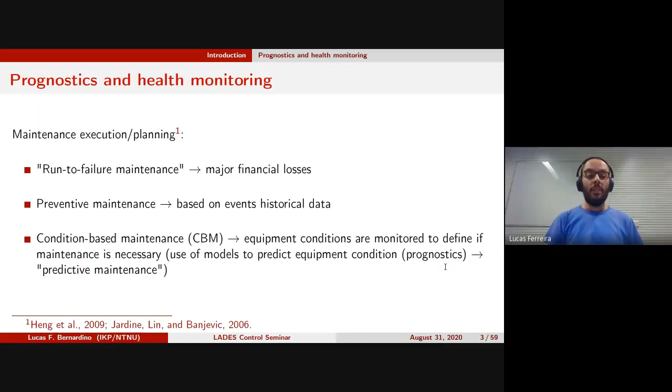But when you do condition assessment, you have to try to use some model to predict what is going to be the equipment condition in the future. And for this we give the name prognostics. This approach is also called predictive maintenance. So with prognostics, the ultimate goal is to try to estimate the equipment's remaining useful lifetime.

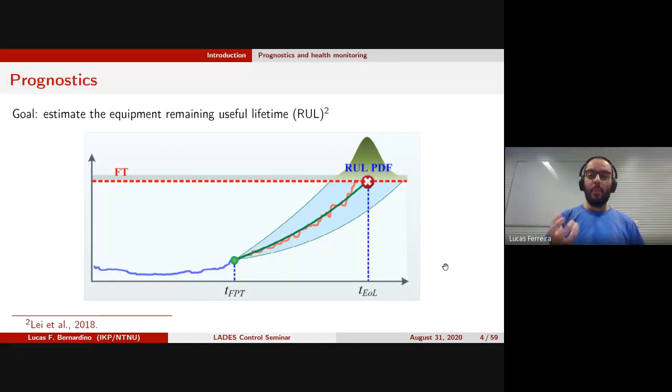And there's a number of ways of doing that. But what we have to keep in mind is that the system is subject to a lot of uncertainty. So usually the remaining useful lifetime, or RUL, is best represented as a probability distribution. So you have to keep that in mind.

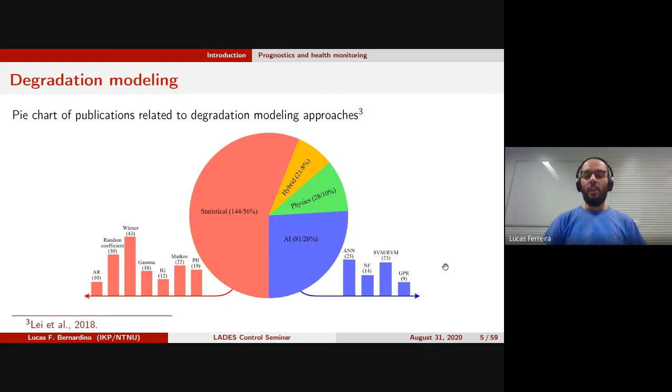When you aim to perform the modeling of the degradation process, we have some approaches in the literature. Most of the approaches used are based on statistical models. Some are based on artificial intelligence models. A few of them are based on physics and hybrid models.

And why is that? Well, let's take, for instance, the Paris law. The Paris law is a classical attempt of phenomenological, or first principle, prediction of crack propagation in systems subject to stress.

So we have this power law model in which A is the crack length, and you have a dependence with the stress applied to the component or the equipment. And there's also this very classical study that describes or measures the behavior of this derivative in wear systems.

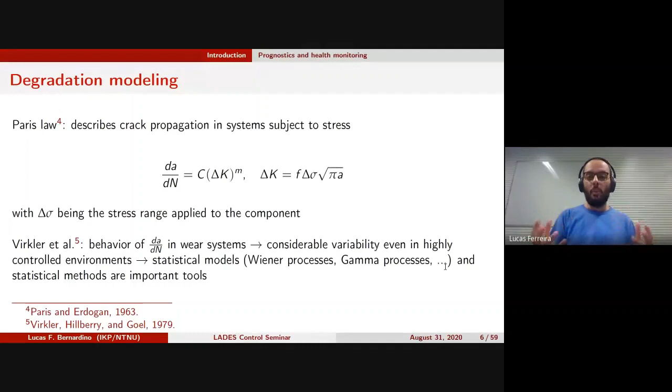And what is seen is that there's considerable variability, even in highly controlled environments. So you see the process is basically statistical by nature. So it's very natural to treat this with statistical models like Wiener processes, gamma processes. And when you don't do that, you have to use some kind of statistical methods to account for the uncertainty and the probability.

One of these statistical methods is the Bayesian filtering. So I'm going to present some Bayesian filtering concepts. This is well known in the control community. It's kind of Bayesian filtering, but the essence of it is to try and estimate states, hidden states of dynamic systems subject to model and measurement uncertainties.

So for you to make the Bayesian filtering treatment, you have to have a dynamic model, which will give you the temporal update of your distributions, and recursive estimation for you to update information with the measurement. And for that, you use Bayes' theorem. We are going to go through a little bit of that.

The basic assumption of Bayesian filtering is that the process behaves as a Markov process. So this means that the process is memoryless. The evolution and the observation depend only on the current state. So what has happened in the past doesn't influence anymore, given the current state.

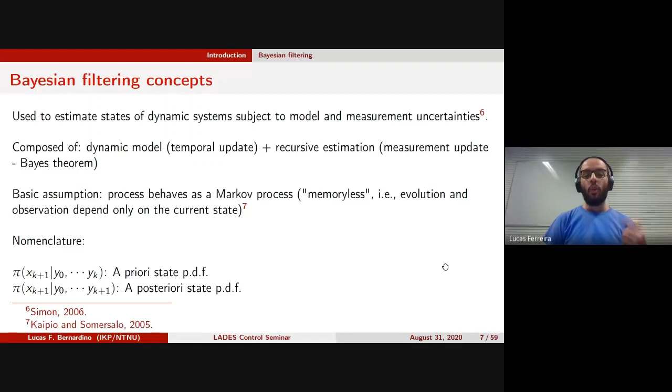So the nomenclature that I'm going to use is this pi for the PDF. So you see an a priori PDF, which is the distribution given measurements up until the previous time instant, and a posteriori when you have incorporated the current measurement. Measurements are given by y.

So the first part of the Bayesian filtering is the temporal update, when you have a PDF that is projected in time. This generates the so-called a priori estimate. So you project the previous a posteriori into the current a priori, and you do this by the second integral.

And you see that this first term on the integral is the probability of the next state given the current one. And this is called the Markov transition kernel in the Bayesian filtering traditional literature, but it's essentially our dynamic model. So for example, we have this very traditional linear model that represents one Markov transition kernel that is going to be Gaussian.

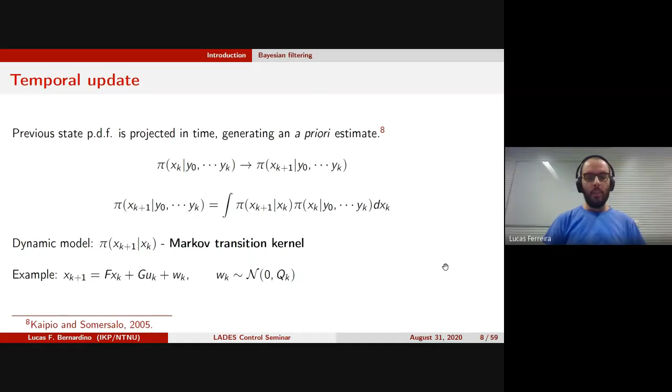Also, the second part of the Bayesian filtering framework is the measurement update, in which you have an a priori PDF that is updated with measurement information, originating an a posteriori estimate. So you have the incorporation of information into the PDF, and this is done by Bayes' theorem. It's the second equation, and the term in the denominator, it's kind of awkward to look into, but it's basically a normalization, so we shouldn't look too much into it.

But what's important is the likelihood function that I have highlighted here. And it's a probability of the measurement given the states. And this is basically your observation model, how you translate the measurement into information about the state. And also, this can be very complicated, but can also be very simple. For instance, a linear model.

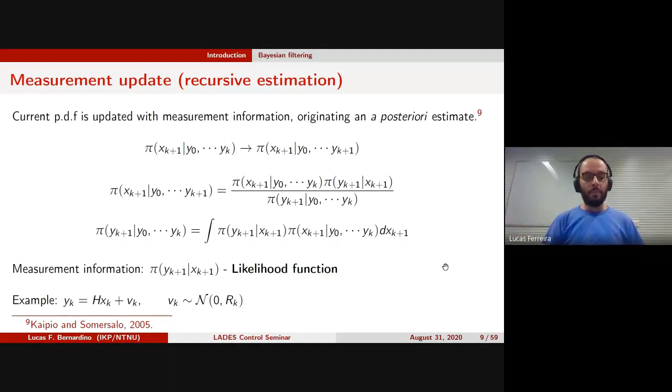And when everything is linear in this framework, we can reduce the Bayesian filtering problem into the Kalman filter. So we have assumed linear dynamic model and Gaussian uncorrelated noise processes. And this generates Gaussian distributions throughout all the states. So it's defined by its mean and covariance.

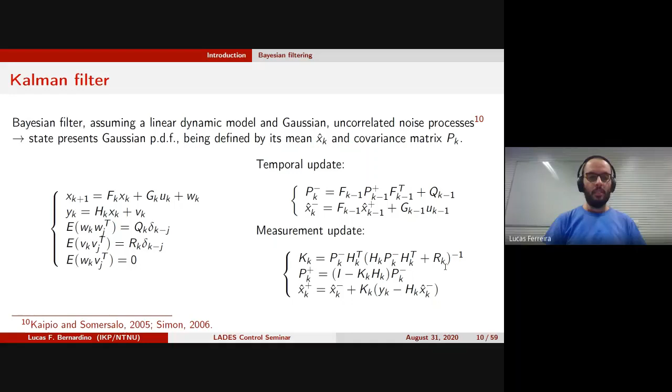But the Kalman filter relies on very strong assumptions regarding both the process model and the distribution of the random variables. So we have some natural extensions for the Kalman filter. For instance, the extended Kalman filter, which is based on local linearization of the dynamic model. So it's adequate for mildly nonlinear systems with Gaussian distributed random variables.

So we are more flexible now with relation to the linearity of the model. With the unscented Kalman filter, we try also to do a higher order approximation for the estimate and covariance of the states, which is based on sampling. The sampling is the unscented transformation, which is deterministic and is optimal in some ways.

So it's adequate for trying to approximate nonlinear systems and distributions that are non-Gaussian, and which can become non-Gaussian by this nonlinear transformation. The particle filter, for instance, is the more complex of these approaches, which is based on Monte Carlo sampling. And we try to approximate the Bayesian filtering problem and reconstructing the distribution itself. So it can deal with nonlinearities and non-Gaussian random variables.

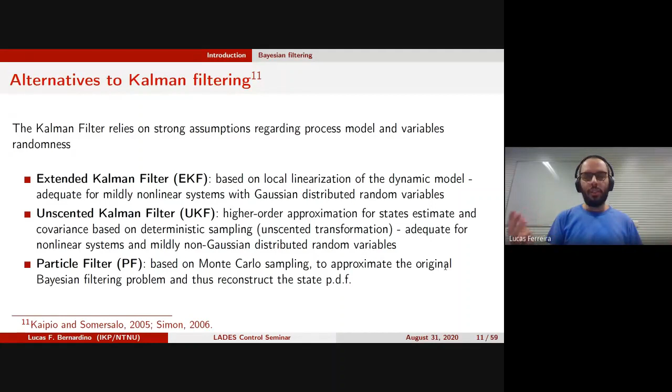So some important remarks about the particle filter. The strategy it implements is based on importance sampling, which is basically the sampling of particles using trial distributions to try and make the state transition calculations more accurate, only looking into what is relevant.

The use of this approach leads us to the simplest particle filter, the SIS filter. SIS filters are very known for having weight degeneracy, which consists of basically you not being able to characterize properly your distribution because you have the curse of dimensionality, and some particles simply are not relevant anymore because of low transition probabilities altogether.

So what is best is that if you could return the particles into a more relevant set. And for this, we have resampling. So the SIR filter comes to try and tackle this issue. And then you obtain a set of particles with equal weights that represent your distribution better. So you replicate important particles and remove low, irrelevant ones, let's put it that way.

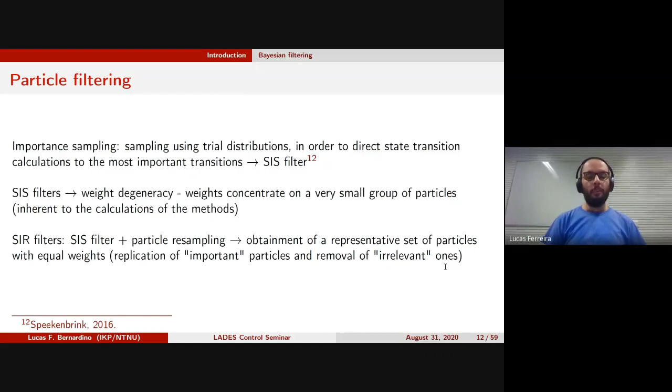Okay, so that was it for Bayesian filtering. But let's go back to our health-aware control definition. Those are basically strategies that consider prognostics into the control structure, and you try to make your control and operational decisions also based on equipment degradation.

The first known appearance of this term in my literature review was by Escobar, in which it was a very simple approach, actually. It was based on a prognostics module and a PID controller, so not necessarily do you have to have advanced control structures for you to do health-aware control.

But before that, this group led by Pereira implemented an MPC controller with health constraints. So this term health-aware control is new, but the approach is not that new, so it's hard to track where it began. In his approach, the failure was prevented on the considered operational window. So we have some other approaches that came after that.

Sanchez made an MPC with a damage term added to the controller objective function, and he observed the trade-off between process performance and the equipment damage.

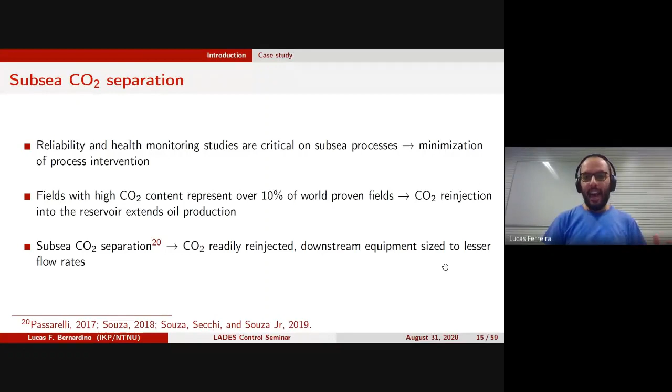So it's very important that we study how to operate optimally this kind of system. The objectives of this work were to investigate the main aspects of the development of a health-aware control system applied to this process of national importance.

For this, we need to study the modeling of the CO2 separation system, perform identification and control of the process. We also need to study the degradation model, in which, in our case, we focus on the multi-phase pump, because that's the equipment that is most prone to degradation.

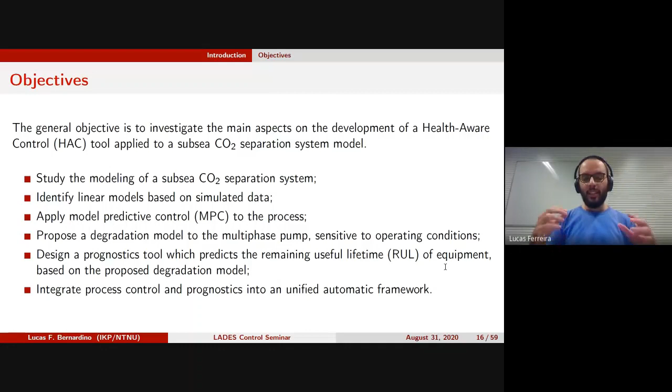And we want this model to be sensitive to operating conditions so that we can optimize the system. We aim to design also a prognostics tool, which predicts the RUL of equipment based on this degradation model, and we aimed also to integrate all of this into a unified framework.

So I'm just checking the time. Okay.

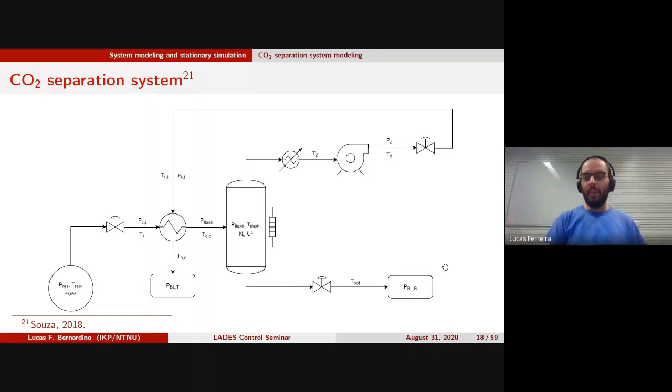And we have an outlet stream that is hot because of the compression. This is the current that is used in heat integration. And the compressed stream is led into reinjection. And the bottom of the flash drum is led into the top side.

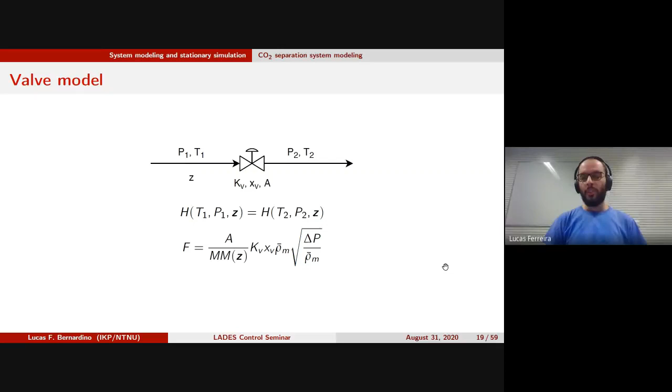Okay, so we have valve models. This is basically a model of constant enthalpy, but we also have to model the flow through this valve as proportional to the square root of the pressure variation.

We have the heat exchanger model, which comprises energy balances. They were performed in a discretized fashion, so we have a model for each pseudo stage.

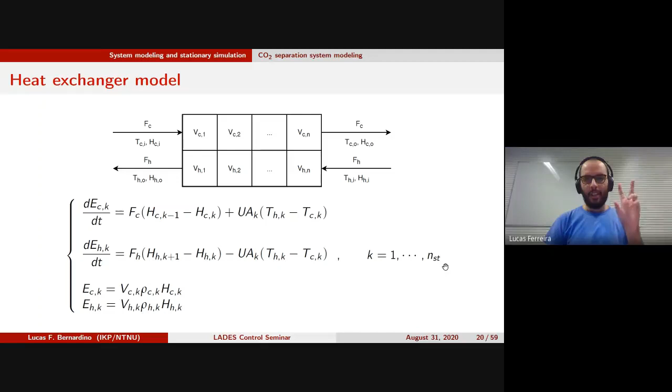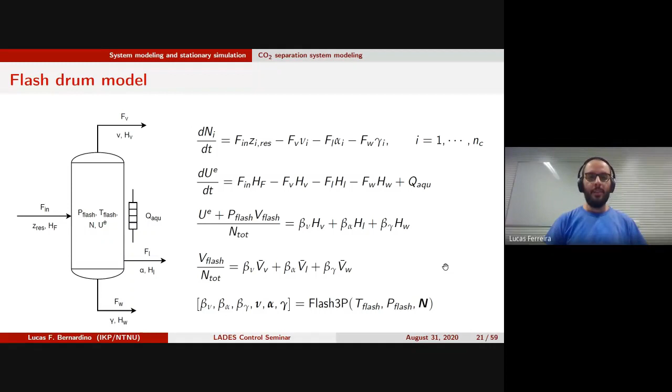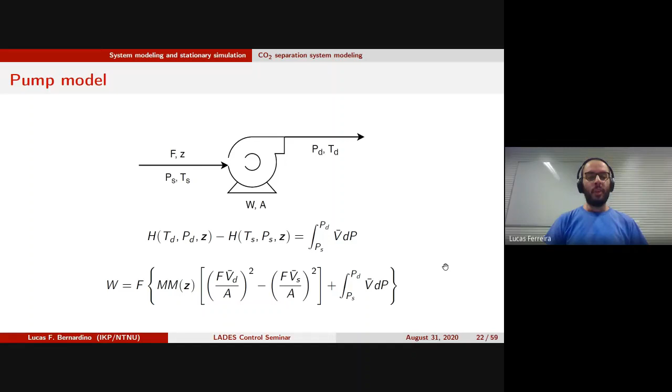But also we have the thermodynamic model that is the key to this problem. We have the pump model that performs energy balance and also the relation between the pump power and the flow through this pump.

So to integrate all of these models, we use Python to model this, to perform the simulation of the system. We use the CO2therm package that was developed by Souza, which was interfaced to Python.

The stationary simulation was performed using fsolve from the SciPy library.

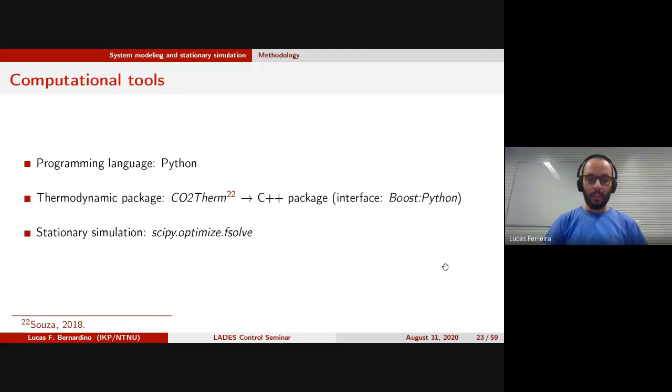So for the stationary simulation, there were some numerical challenges. We had to split the problem into two: first solve the mass balances that involve some of the temperatures of the process and the valve openings, and then go and solve the remaining equations.

The values that I present here are the values for design of the system. So yeah, we performed the stationary simulations, and these are the results. They are described in my dissertation.

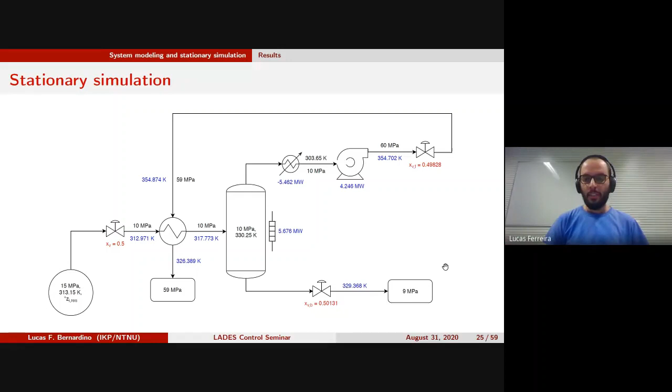So after that, it was time for designing the controller for the system. So we have to consider the system in its dynamic form. And the modeling that we performed resulted in a differential algebraic equation system that was challenging to solve, but fortunately...

Python has a nice library to solve DAEs, which is the IDA algorithm included in the Assimulo package. So if anyone is interested in this kind of problem, this is a nice tool.

So possible disturbances are the reservoir conditions and the battery limit pressure values, the pressure on the top side and the pressure of injection. For manipulated variables, we have basically the valve openings and the duties of the heat exchangers and the pump power, of course.

And we selected some output variables that are important for operational purposes, which are the flow from the reservoir, the pressure and temperature of operation of the flash, the temperature after the heat exchanger, the flows of each of the batteries, the composition of CO2 that is separated, and the liquid volumetric fraction of the flash that is important.

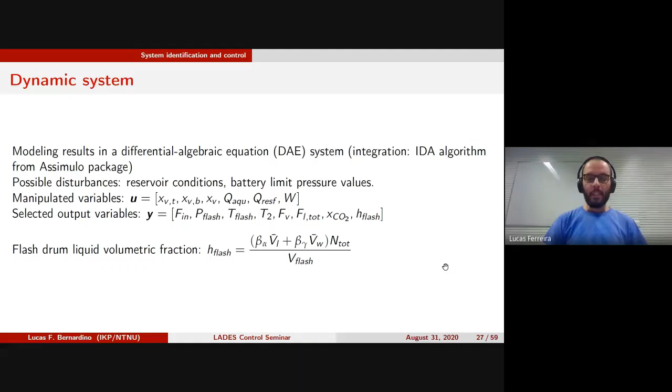It's basically a level control. So as this pair, volumetric fraction and bottom valve, is available for use to stabilize the plant, because we have an integrating behavior on the flash drum, we chose this pair for stabilizing the system.

So we tuned the PI controller for that using the SIMC rules. For that, we have to identify an approximate model, and this was done with some step changes in the valve opening.

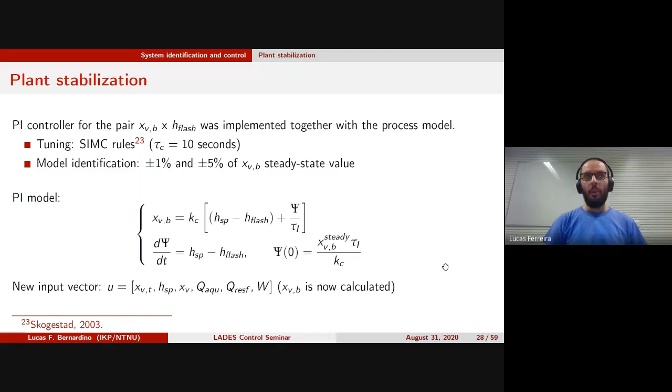So this is the implementation that we did for the PI model. It's an idealized version, continuous version. And the new input vector, of course, we have to remove this valve, and now we have available for us to manipulate the set point of this controller.

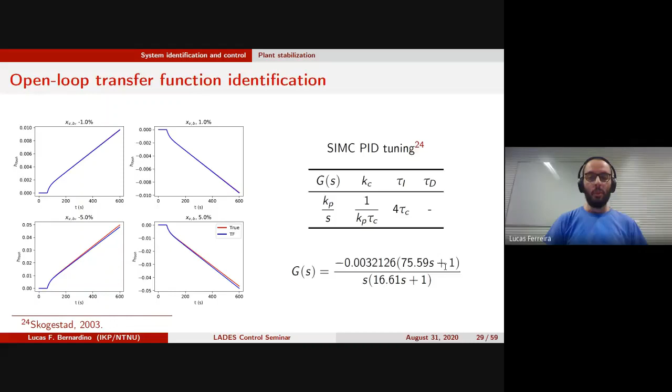So these are the identification results. The system behaves almost as an integrating system, I'm sorry. So for that, we use SIMC rules. And for the tuning that we used, these are the servo test and the regulatory test.

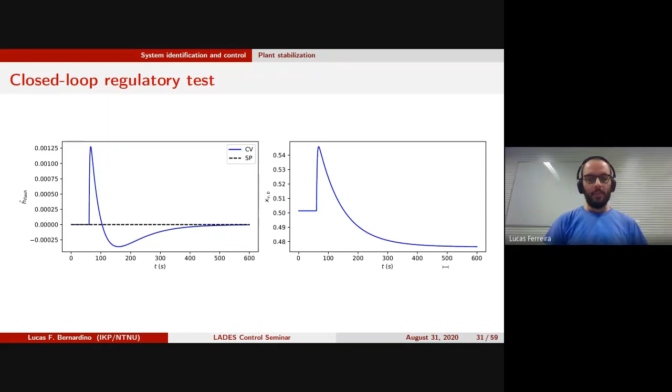After that, considering the stable plant, we performed model identification, now aiming to implement the MPC controller. For the MPC controller, we have to have a good internal model, so we have to make step changes in all of the possible manipulated variables, including, of course, the set point of the drum level.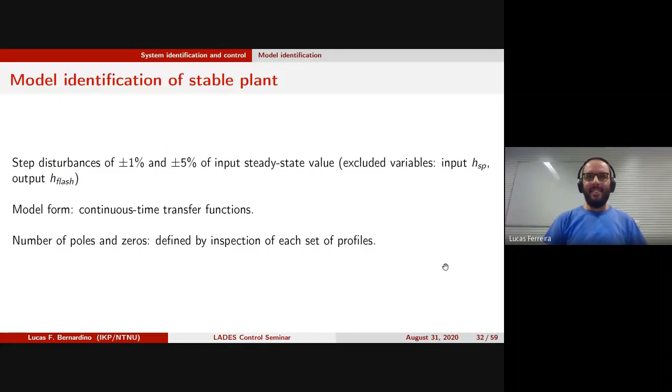So we try to identify continuous time transfer functions. And the number of poles and zeros was defined by inspection of each of the profiles, because the behavior of the system changes between pairs of inputs and outputs.

But using these transfer functions that were identified, we aim to describe the system into this linear time invariant discrete time model. So for that, first we converted the transfer functions into continuous time models using some algebraic manipulations, and we discretized the system to obtain this kind of model.

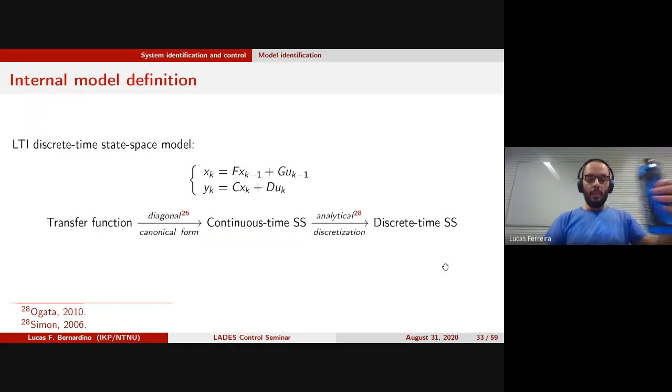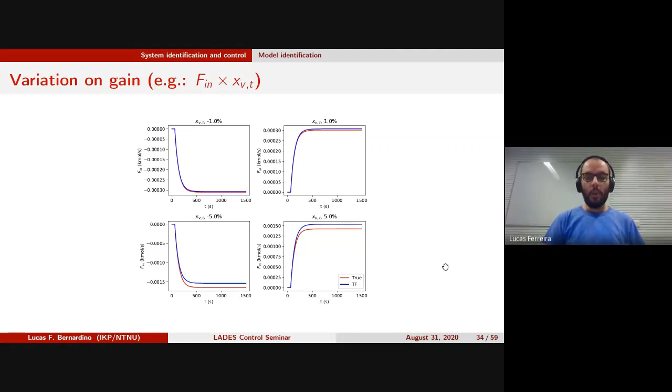Okay, so here we can see some results of the model identification. This gives us some insight into the nonlinearity of the system, because we see some variation of gain when we do a positive step change into one of the manipulated variables, compared with a negative step change. This happens with most of the variables. Thus, it's important for us to do both the positive and negative and obtain an average transfer function, so we don't have too many errors.

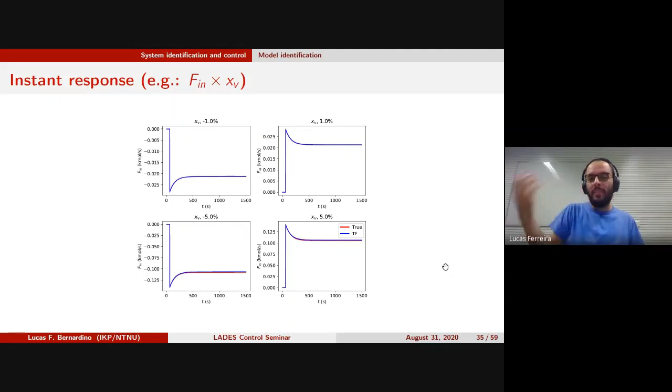Some of the variables presented instant response. For instance, when we consider this input-output pair, which is the flow that passes through the same valve that is opened, it's going to present an instant response. So we have those complexities in our model.

Then we proceeded to do a Kalman filter implementation with the equations that I have already shown, but just once again: the temporal update, in which we obtain a priori estimates for the state and covariances, and also the measurement updates, in which we obtain a posteriori estimates. The tuning of the filter is done by changing the Q and R matrices, which represent how much you trust your model and the measurement that you have, respectively.

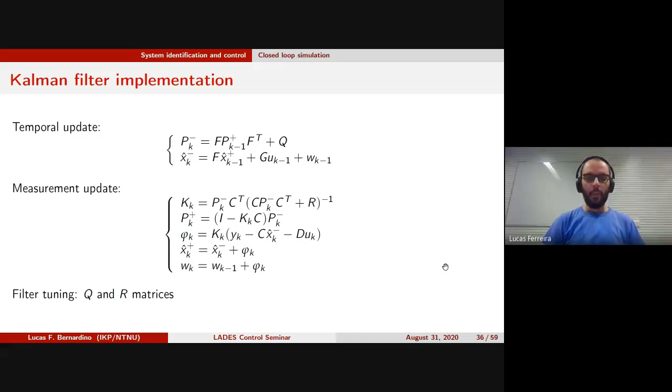After that, we proceeded to the MPC implementation, which is based on the classical optimization problem of minimizing the deviation of the output variable from its desired set point. This is weighted by Q in this equation, but we also have to consider weights on the manipulated variable, so we don't have a very aggressive response. This is weighted by S.

This optimization problem is subject to some constraints, mostly regarding maximum and minimum values of manipulated variables and manipulation effort, delta U, and also, of course, the dynamic model that we have.

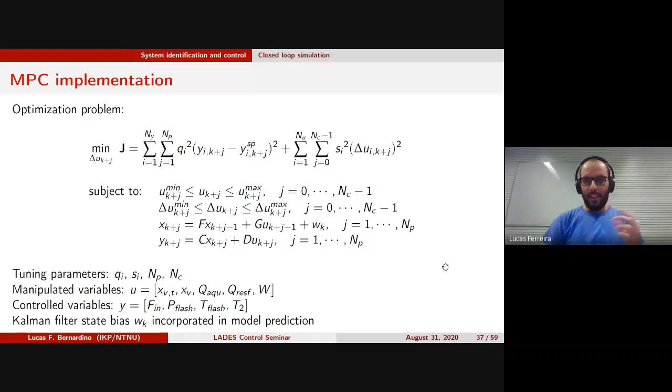And in this dynamic equation, you can see that we have this WK term. This is the Kalman filter state bias, and it's important to correct the internal model of the MPC. So it's important that we implement the Kalman filter state bias into the MPC. This was a very valuable lesson that I learned from this work.

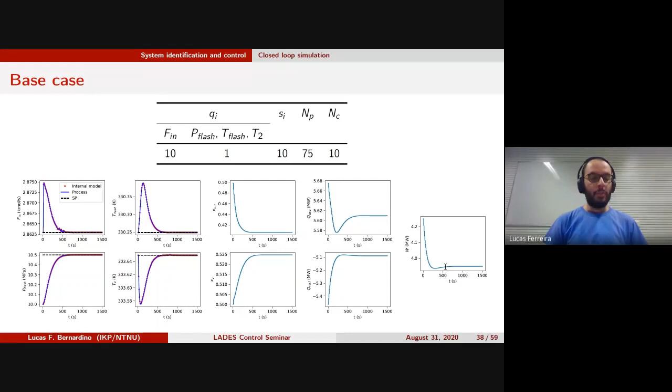So this is the base case, considering all that was discussed before and using these tuning parameters for the controller. We see that we have no offset, we have the attainment of a new steady state. This was basically a change of set point into the flash pressure, which we can see on the lower left corner of the screen.

Now I would like to discuss the importance of the elements of this control framework. The first is the filtering, the most basic filtering, in which we only trust the internal model and have no feedback basically. So the process has some offset because the internal model is not accurate enough, because the system is nonlinear, and we are trying to represent it with a linear model.

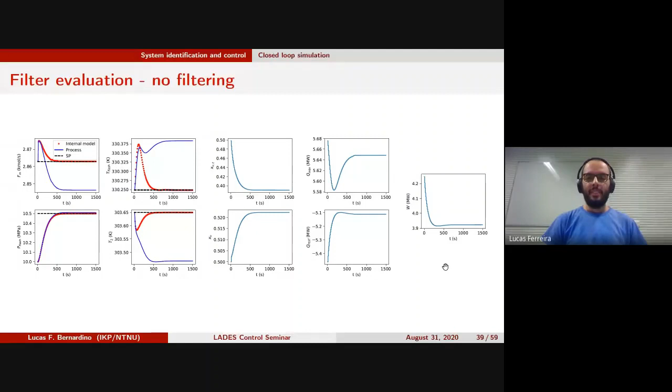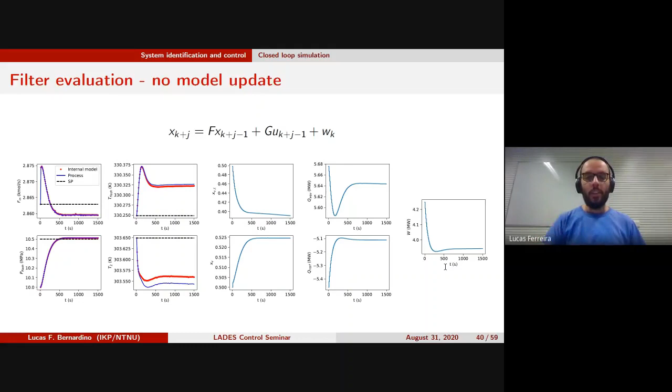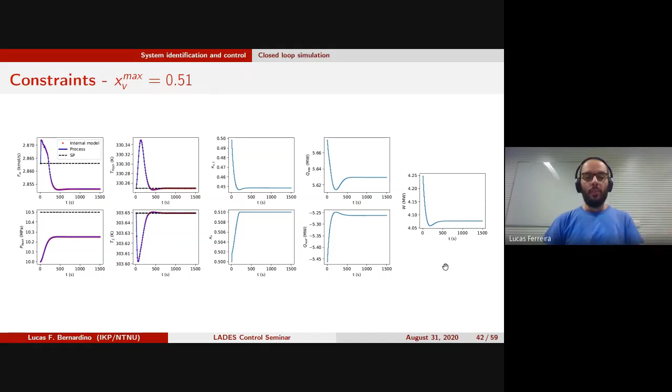We have also done implementation of constraints, and this changes the steady state that is attained, because we have more manipulated variables than controlled variables. In this case, we have attained a new steady state, and the steady state has no offset, despite the fact that it's a different position of the manipulated variables. But if we implement other kinds of constraints, the system might not be able to track the set point correctly.

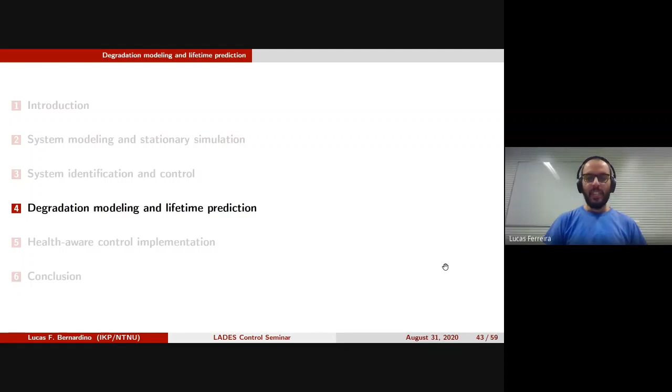Okay, now we come to the degradation modeling part and lifetime prediction. For the degradation model, we hypothesize that the degradation could be modeled by Paris law, which is first-principle based, but we consider a random growth rate given by a gamma distribution. This gamma distribution is very common in the degradation literature. So this model has both the simplicity and variability necessary for a degradation model, but is also very descriptive of most systems.

So we have this power law model of the evolution, and the delta F variable is distributed according to a gamma distribution. These parameters are characteristic of the degradation process. And the observation model, we consider it to be comprised of the state and some Gaussian noise.

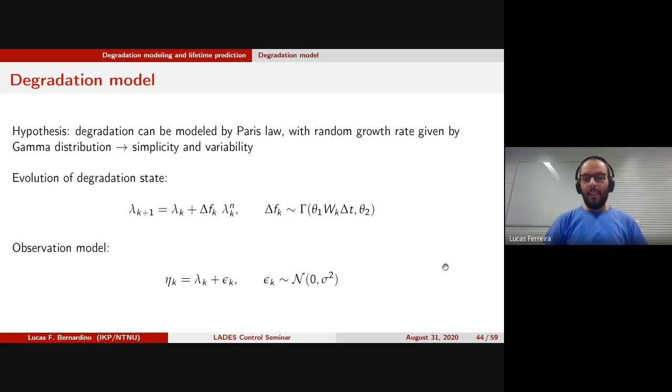For this degradation model, I forgot to mention that this delta F parameter depends on the pump power, so we can actually manipulate how the system degrades. Here we can see two profiles of the simulation, the degradation model, one with constant pump power and the other with varying pump power. We see a lot of curves in the top graphs because the system is stochastic, so we have done several simulations of the same system just for you to have a notion of the variability of the degradation process. This is kind of the expected behavior.

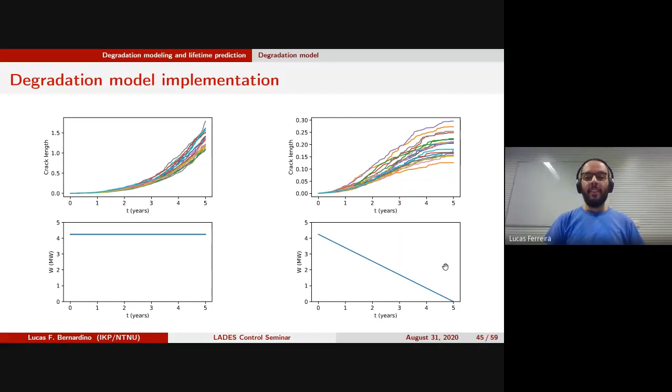So for the crack length estimation, we use the model that we described with this set of parameters that try to describe a generic degradation process. But what is important here is that we use particle filter to perform state estimation, and then with the state estimation, we try to predict the lifetime of the system.

So we use an algorithm written by Speekenbrink, and we adapted it to consider deterministic equations with random parameters, which is this kind of model that we described, as opposed to the most traditional description by probability distributions, as in those Markov transitional kernels and likelihood functions. This is the most traditional.

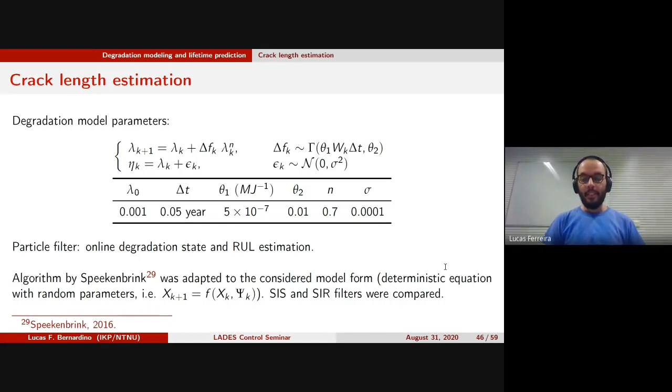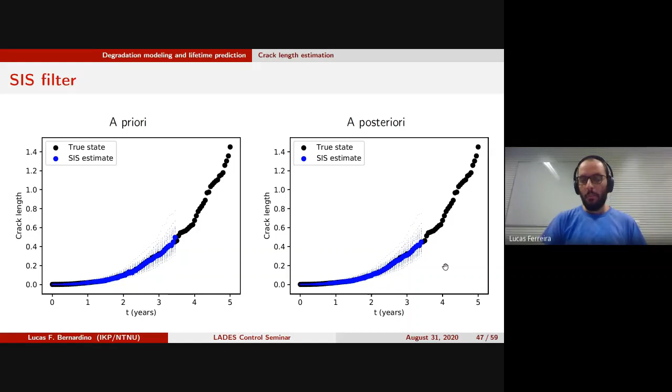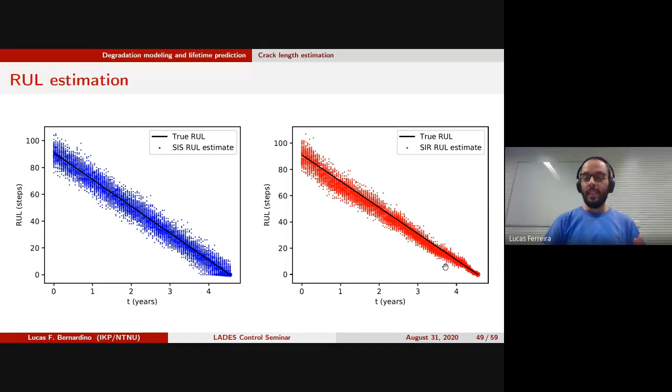And for lifetime estimation, RUL estimation, we compare both the SIS and SIR distributions. We see that the resampling strategy is very well suited for this kind of problem, because the distribution for RUL is narrowed down as time passes, whereas in SIS we cannot do this, because the particles that are not important are kept there. So resampling is very nice for this kind of problem.

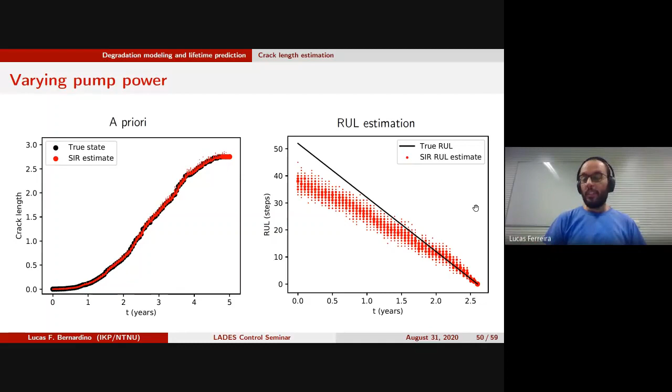As for the health-aware control implementation, we tried to implement a controller that had both the RUL extension objective, but also the control objectives, the set point attainment and manipulation effort terms. But in this case we have different time scales, so the degradation is happening a lot slower than the control. So we considered that only the ending value of the pump power is relevant in the degradation.

This kind of function is not so convenient, because RUL is a random variable, so we have to remove the randomness to treat this problem as deterministic if we want to treat it this way. We do that by sampling some quantiles before the optimization, related to the probability of each realization. So we transform the random variable into a deterministic variable, but that's also representative.

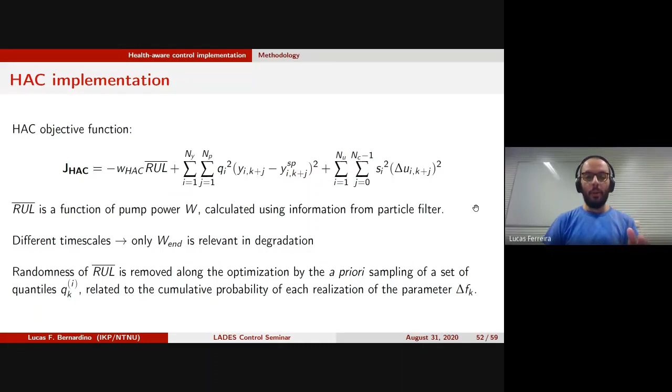Okay, so in the objective function, we see that the control objectives and the RUL extension objectives are weighted out by this WHAC parameter. So we see the effect of this parameter in this simulation.

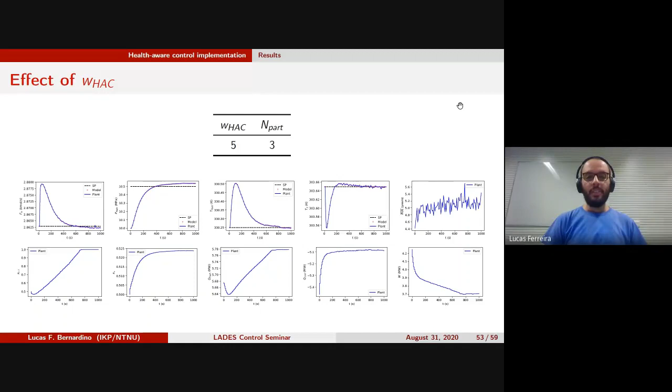With the value of 5, we can see that the set point is attained with some small offset, but also in the lower right corner the pump power is minimized, so we minimize the stress in the degrading equipment, while also maximizing the valve opening at the top that is modulating this pump. When we increase this parameter, we tend to increase this offset, but if it is large enough, we can have divergence of the system, and we are close to the shutdown of the pump, as we can see in the lower right graph. So this kind of objective function is dangerous to work with, basically. We have to pay very close attention to the tuning.

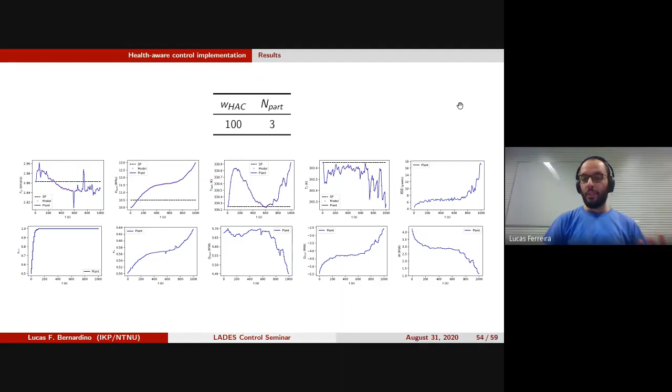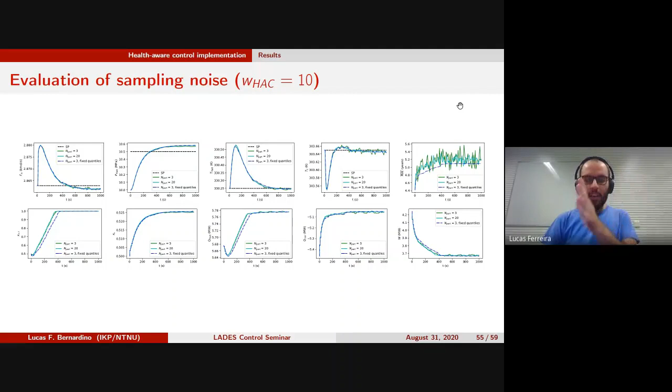We also evaluate the sampling noise. This was done by fixing the tuning parameter, but varying the number of particles and how you treat the optimization problem. We see here that the results are very random, because when you solve that optimization problem, if you have a random variable that is updated into each of the optimization problems. So if you want a response that is not this noisy, you have to fix those quantiles that are related to the probability of each of the realizations of the degradation process.

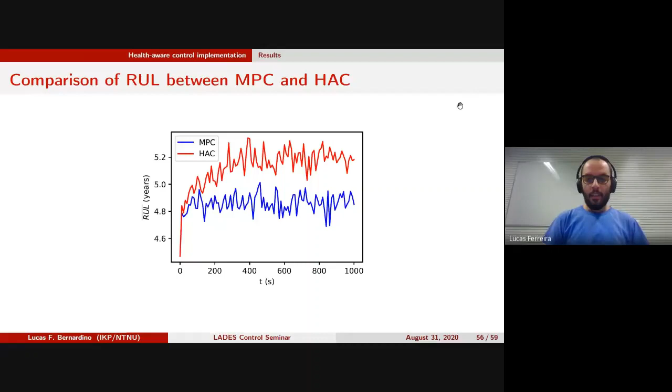So this is a nice result, but this approach had a lot of challenges. So let's conclude the presentation.

In this work, we have done modeling, control and prognostics. Looking back, it was a lot to do in one year, but it was well worth it, because I got to learn these different approaches.

The control strategy was successful, and we show here the importance of model correction based on Bayesian filtering when you have model plant mismatch, which is basically every time. We propose a degradation model that reproduces the expected behavior for degradation, and a particle filter was implemented for state estimation and RUL prediction successfully.

In the health-aware control part, which was the last results that we got, we contraposed health and control objectives. So it's not optimal to treat those problems in the same control layer.

But also one could try to use multi-objective optimization to optimize both objectives separately in the same optimization problem. We saw unstable behavior with high weight on the RUL extension, and this is a known issue in the development of economic MPC, for instance.

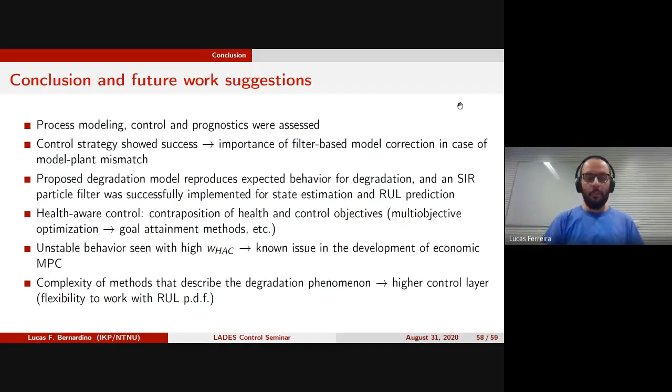Thank you very much, Lucas, for your very nice presentation. You have presented so many interesting topics. This concept of health-aware control is, as you said, a new concept, so people may be very interested. Also, the process is very interesting. We have some people here from Petrobras, for example, and we have proposed a model and a simulation for this process that was proposed by Petrobras. And also you treated the question of the degradation model, so you have very interesting aspects to discuss.